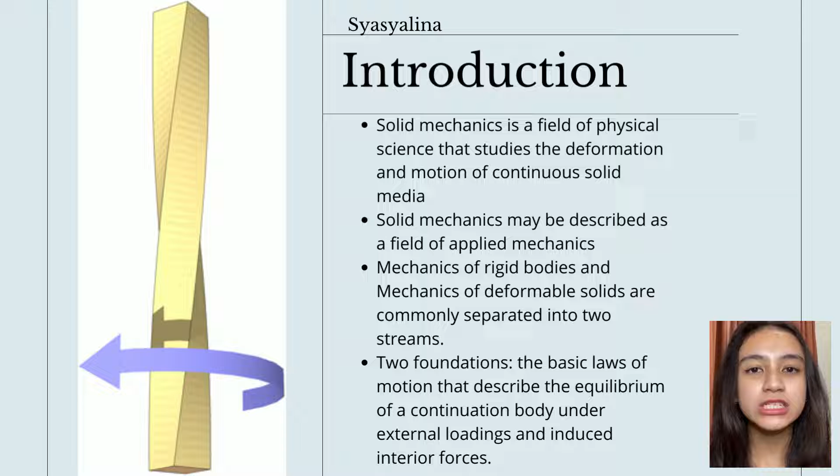Mechanics of rigid body, or simply mechanics, and mechanics of deformable solids are commonly separated into two streams. The basic theory of continuum solid mechanics is founded on two foundations: the basic law of motion that describes the equilibrium of a continuum body under external loadings, and induced interior forces.

The purpose of this study is to analyze the concept of the chosen topic, which is torsion. Torsion is the twisting and wrenching of a structure caused by forces, which results in rotation motion in one longitudinal axis, while the other spins in the opposite direction.

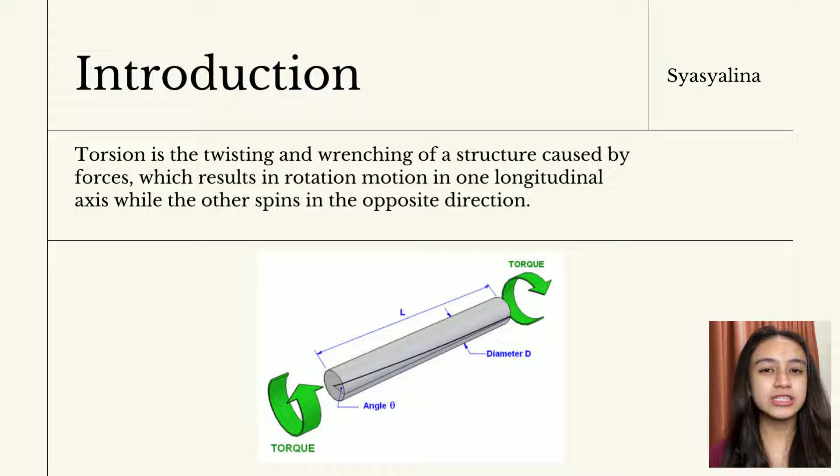Torque in torsion produces a stress dispersion across the cross-section, while other axial loads produce a constant or average stress across the object's cross-section. Without noticing, the use of torsion in daily lives are countless.

Torsion force contributes to a vehicle's smooth and seamless movement. Torsion springs are utilized in a vehicle's chassis, gearbox, clutch, suspension system, and other components.

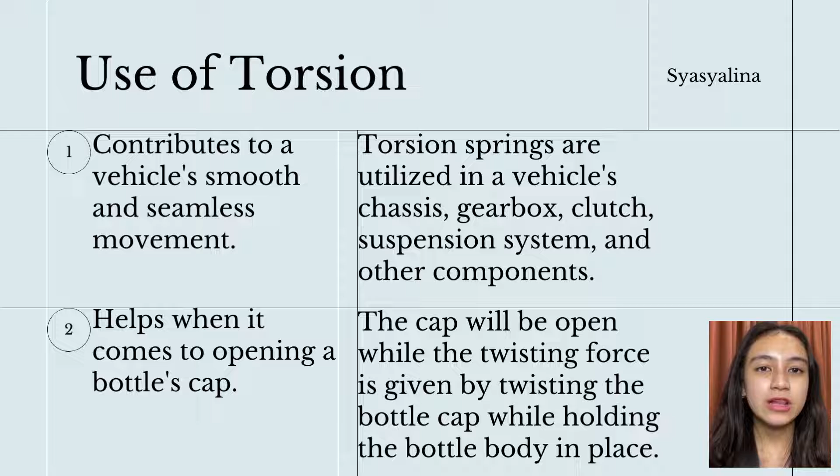Other than that, the concept of torsion helps when it comes to opening a bottle cap. The cap will be opened while the twisting force is given by twisting the bottle cap while holding the bottle body in place. Pure torsion occurs whenever a bar or shaft of a circular section is twisted by a moment.

And the deformed element is in a condition of pure shear. In torsion analysis, just a few assumptions are taken into account.

The shaft longitudinal axis stays straight. The shaft doesn't grow or shrink in length. As the cross-section rotates, radial lines stay straight and radial. Cross-sections rotate around the member's axis. The right-hand rule also can be used to link torque direction to rotation direction.

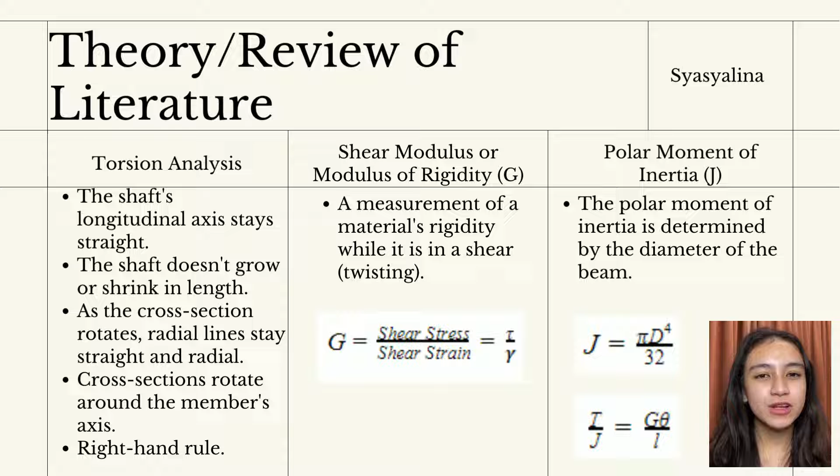The shear modulus, also known as the modulus of rigidity, is a measurement of a material's rigidity while it is in shear, which is twisting. The polar moment of inertia is determined by the diameter of the beam.

Torque is a force's proclivity to spin the substance to which it is applied. The magnitude of the part of the force vector that is located in the perpendicular plane to the axis is also the torque. Other than that, torque is found by multiplying the shortest distance between the axis with the direction of the force component with respect to the axis of rotation.

Shear stress is a force that tends to deform a material by causing it to slide on planes parallel to the applied tension. The shear that results is extremely important in nature, since it is linked to the downslope motion of Earth and earthquakes. Shear strain is defined as a change in angle between two previously perpendicular lines.

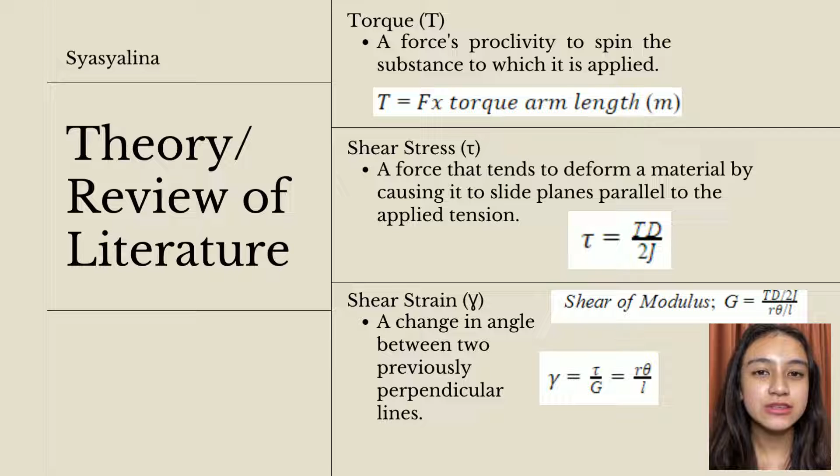Assume an elemental area that will be distorted, resulting in angular shifts, yet the sides of the region remain roughly the same length.

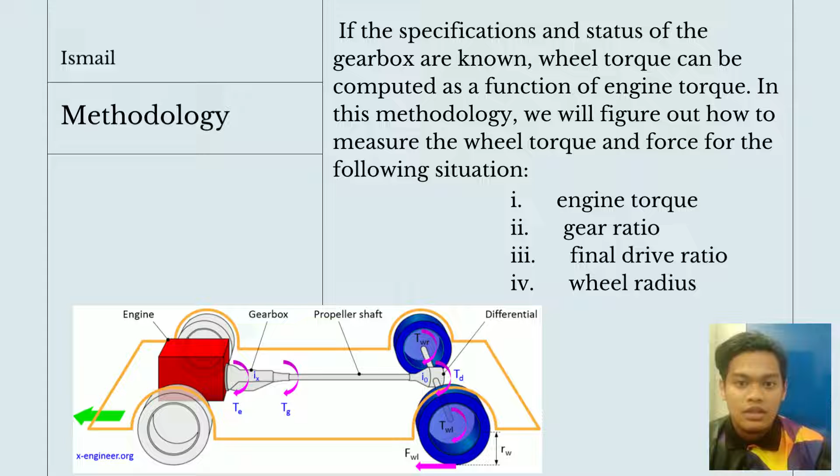If the specification and status of the gearbox are known, wheel torque can be computed as a function of engine torque. In this methodology, we will figure out how to measure the wheel torque and force for the following situation: first, engine torque; second, gear ratio; third, final drive ratio; then the last one, wheel radius.

Now I will explain about the formula that we use in this calculation for the project. The mathematical formula of the wheel torque as a function of the engine torque is obtained by substituting the first formula into the second formula in the third formula, for a given gearbox ratio Ix and a final drive ratio I0.

For the second formula, the formula of the wheel force as a function of the wheel torque and wheel radius can be found in this formula.

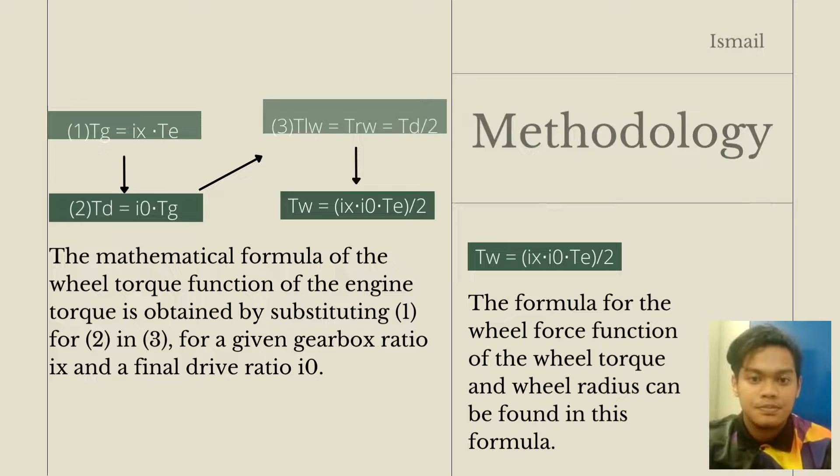Now I will talk about the calculation. With the given values, calculate the wheel torque and force for a rear wheel drive vehicle, RWD.

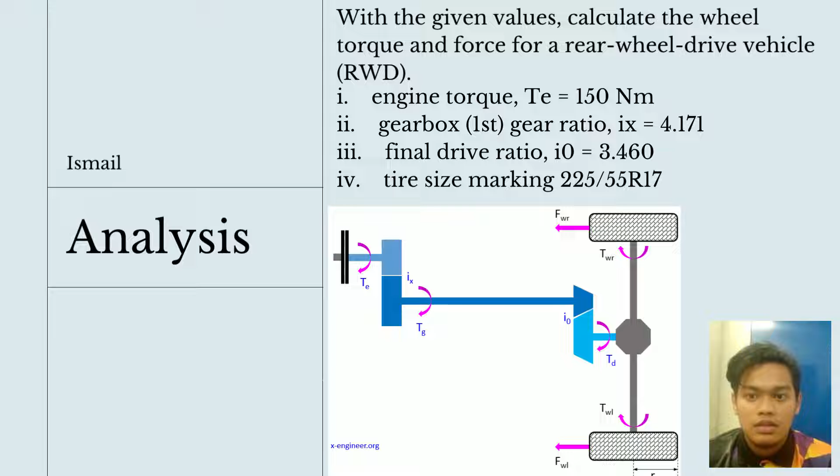First, engine torque: 150 Nm. Second, gearbox first gear ratio Ix equal 4.171. Third, final drive ratio 3.460. And the last one, tire size marking 225/55R17.

Now I will explain the steps for the calculation. First, calculate the free static wheel radius from the tire size marking. The method for calculating the wheel radius is described in the methodology on how to calculate wheel radius. The calculated wheel radius RW equals 0.33965 meter. Second step is to calculate the wheel torque using this equation.

3.460 multiply with 150, divide with 2, and the answer is 1082.3745 Newton meter. The last step is calculate the wheel force using this equation: 1082.3745 divide with 0.33965. The answer is 3186.7349 Newton.

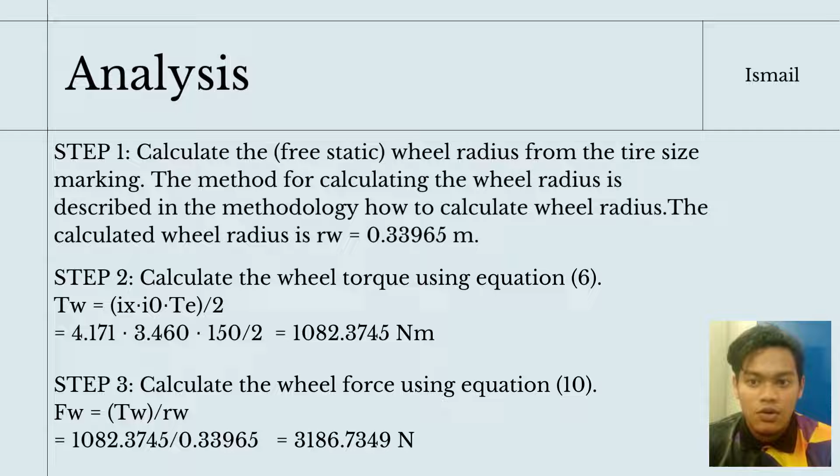First, we use the formula TW equals IX times IO times TE divided by 2, from equation 6 in the methodology, to calculate the wheel torque. We use this formula because we find all the values given in the question and compare all the equations given in the methodology to find a suitable equation to find the wheel torque. So TW equals IX times IO times TE divided by 2 is suitable for this method.

Next, we use the equation FW equals TW divided by RW, from equation 10 in the methodology, to calculate the wheel force. Same as before, we find all the values given in the question and compare all the equations in the methodology to find the suitable equation with the given values to find the wheel force.

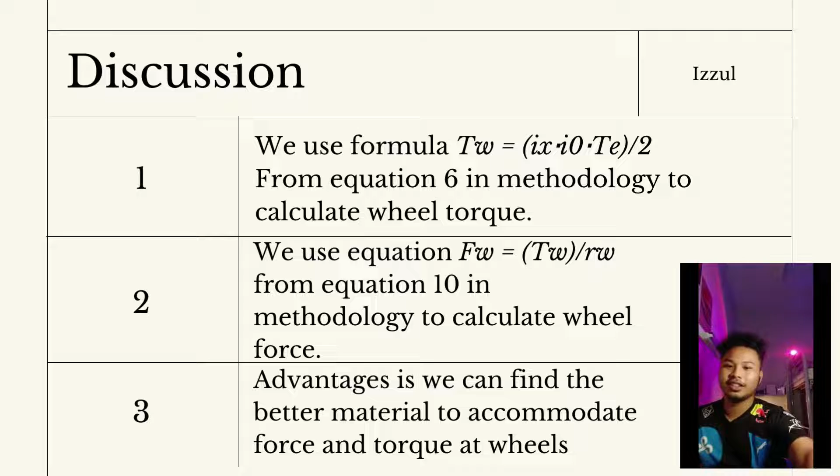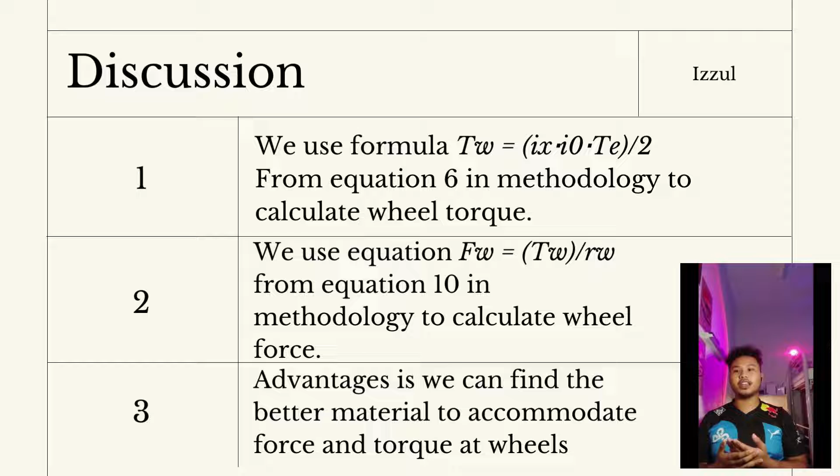So from all of the calculation, we got some advantages. First, we can find the better material to accommodate force and torque at the wheels, because the materials used in the automotive industry may not have the strength to accommodate the torque at the wheels, so the manufacturer can make the drive shaft more reliable and last longer.

Also, the manufacturer can set the car suspension according to the force and torque at the wheels, because from this calculation we can find the torque and force at the wheels. So the suspension settings are compulsory to making the driving experience more fun and comfortable for the drivers and passengers. From the advantages we got, we also have disadvantages.

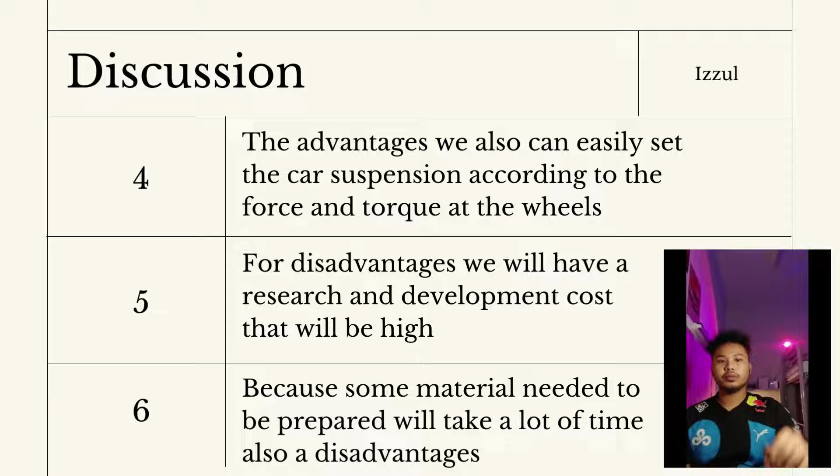The disadvantages: we will have research and development costs that will be high. That is because of the time consumed and the money used to find better materials, doing research to find the better materials, to make the best drive shaft or crankshaft for the car, to make the driving experience and the car more reliable. The last disadvantage is that the material we need has to be prepared and takes a lot of time to make.

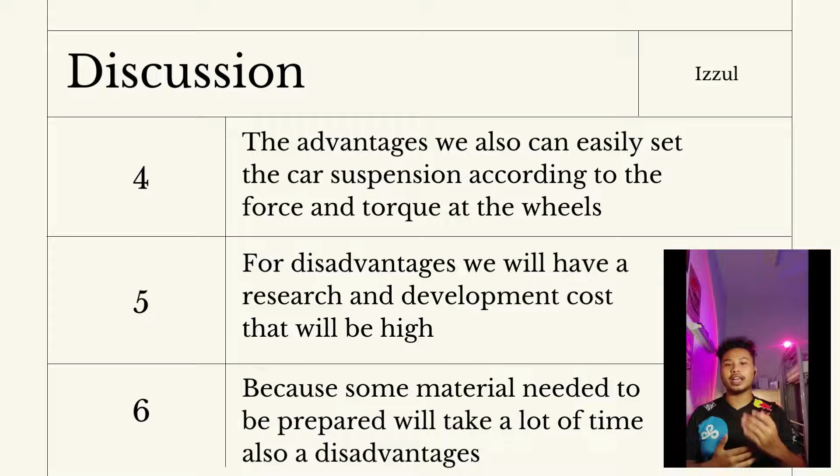Because some of the materials are not abundant on this earth, we need to wait or make the materials for a long time to produce them. So the time consumed will be high, so the car production may be slow to produce the car and deliver it to the customer.

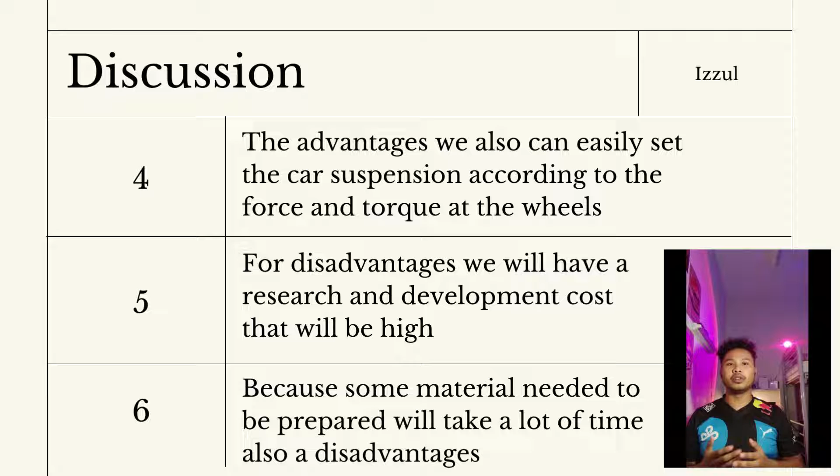For the conclusion, torsion is a very important subject in solid mechanics, because the topic is very useful in many areas, especially in automotive engineering. In automotive engineering, we need to find the torque at the wheels, at the crankshaft, and at the drive shaft, to make the best material to be used in all of the shafts and drivetrains.

Also, engineers will be able to update the material used for drive shafts and drivetrains that can be used in the automotive area, because the automotive area is one of the areas that is very fast forwarding in modernity.

Plus, today we don't only have internal combustion cars, we also have electric cars. So the torsion topic is very important for making the drivetrains and drive shafts for electric cars too, because electric cars also use shafts in their cars.

For making a better drive shaft, we recommend using aluminum alloy material, because aluminum alloy has good mechanical properties and good weldability. Also, aluminum alloy is a lightweight material compared to other materials used in manufacturing a drive shaft or drivetrain. We also recommend using the CNC turning process for making the drive shaft or drivetrain, because it can increase the production speed of the drivetrain and drive shaft, and is also cost effective and safer in industrial operation.

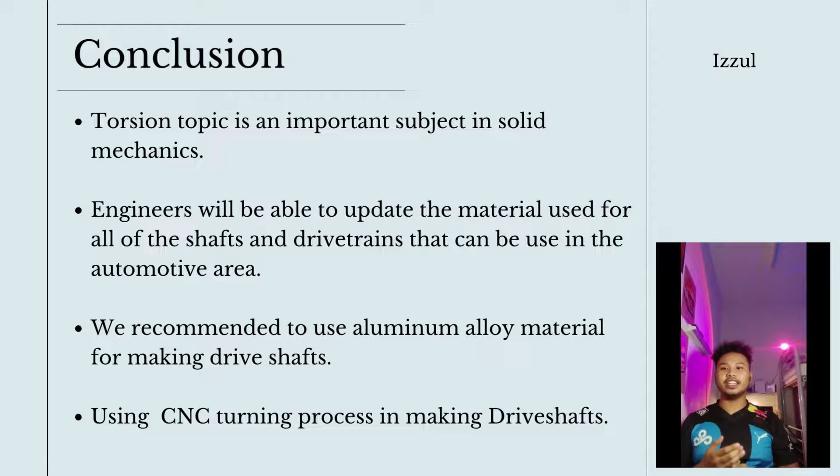For closing this conclusion, we also hope the torsion topic will become a major thing in many applications in engineering, not only in automotive engineering. That's all from me. Thank you.